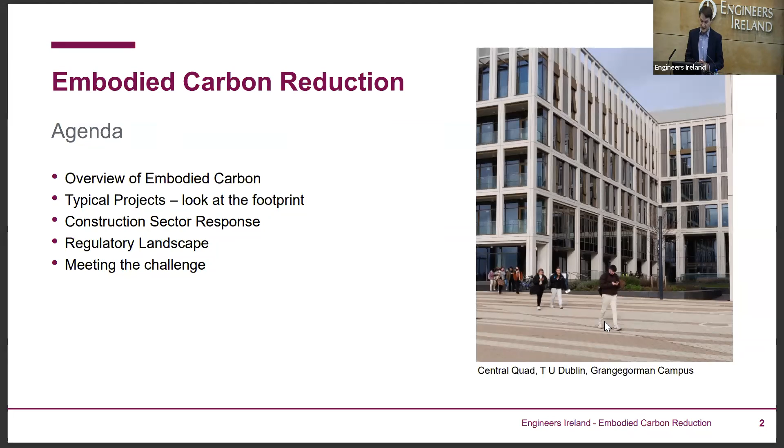We'll just look at an overview of embodied carbon, for anyone who isn't familiar with it already, and look at some of the projects and how we're going about measuring embodied carbon in those. We'll see how the construction sector is responding overall, look at the regulatory landscape and what's coming down the track for organizations and for projects, and then maybe how do we rise to the challenge as an engineering body ourselves.

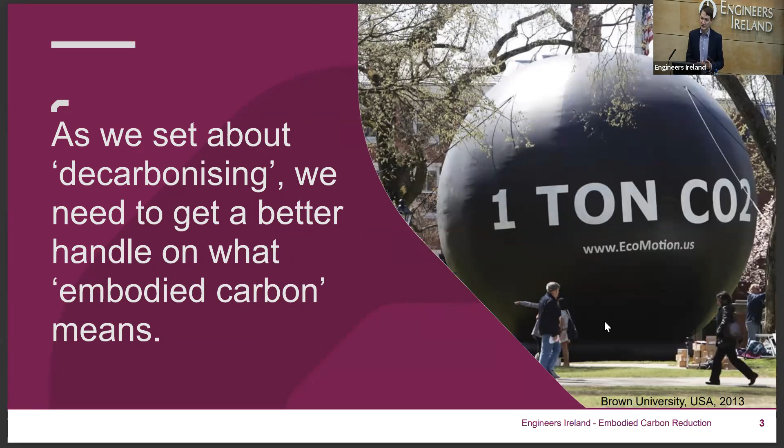The first thing to do, we talk about carbon becoming a very, very common word in parlance and media, but do we understand what it means and do we know what it looks like? The picture on the right is a slide from an American university in 2013. They said, let's create a graphic depiction of what a ton of carbon dioxide looks like, and that's what it is. So we all need to start figuring out more what a kilogram is, what a ton is, what impacts our own lifestyle is having, and more importantly, as designers, engineers and project managers, what impact our projects are having.

Now, because you're all good, knowledgeable CPD people here, you probably know the answer to this off the top of your head. And the answer, of course, is that when you divide Ireland's emissions by the population, you get about 12 tons of carbon dioxide per person per annum. That's 12 of those big balls that we're dragging around with ourselves individually.

If you look at the graphic on the right, you won't be able to see the detail, but it shows, from the developing world, the Democratic Republic of the Congo as the country with the lowest per capita footprint, all the way up to Qatar, which is the highest. The average across the globe is about 5 tons. So Ireland is already double the global average per capita.

And we're a lot higher than some of our peer countries, such as the UK or some of the Scandinavian countries. I suppose one of the challenges globally is that all the countries who want to develop, who want new infrastructure, who want better quality of life, have a lot of investment and infrastructure to build. Do they repeat the mistakes we've made with high intensity, high carbon solutions, or can we globally find better solutions and spread them across the world?

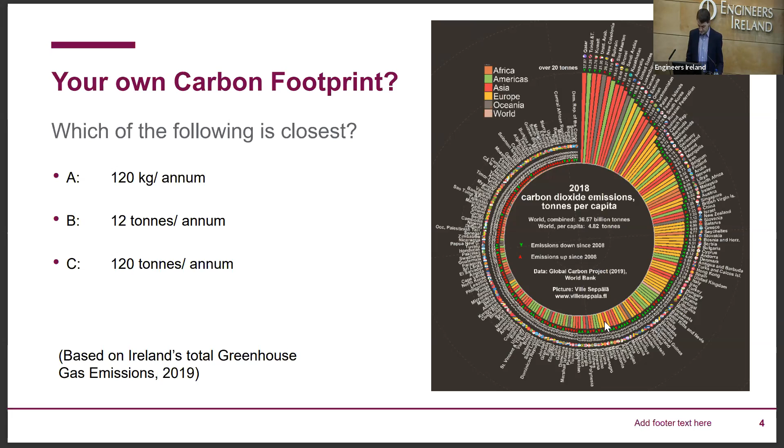The built environment, which is what we're talking about mainly tonight, is responsible for a lot of the global emissions of greenhouse gases. It's estimated about 40% of all emissions are related directly or indirectly to the built environment, buildings and infrastructure. It's also responsible for 40% of energy consumption, 50% of all raw material extraction—so that's a really big footprint on the planet—a third of all potable water use, and a third of all waste generation. So architects, engineers, quantity surveyors, we all have a responsibility to address this.

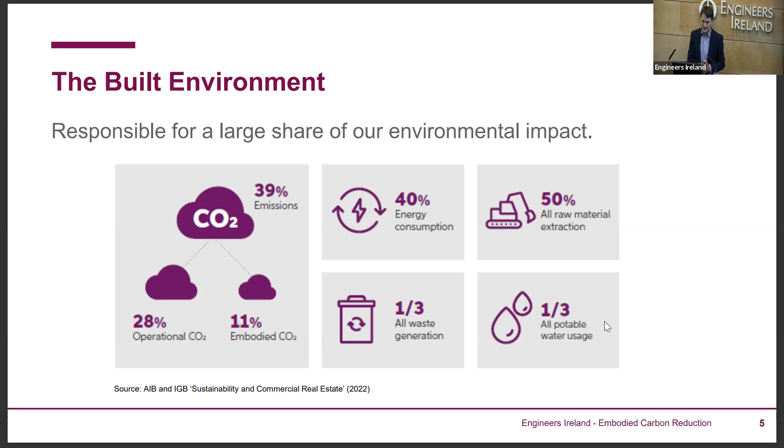In the carbon emissions breakdown, about 28% is associated with operations, which is the energy, heating and cooling, and then 11% is associated with the embodied carbon.

So one of the things your committee is working on is reducing the carbon footprint, or the carbon content, in our electricity grid and our gas grids.

And we know we're on a trajectory in Ireland to get 80% renewable electricity onto our grid, which will mean we'll have a very low carbon intensity intrinsic to every unit of electricity we spend by 2030.

So that's happening around the world, and as that's happening, the operational carbon is reducing, as seen there in the grey. The grey elements are getting smaller, but if the green stays the same, the green changes over the coming decade from being a subsidiary element to being the main element in the carbon footprint of buildings.

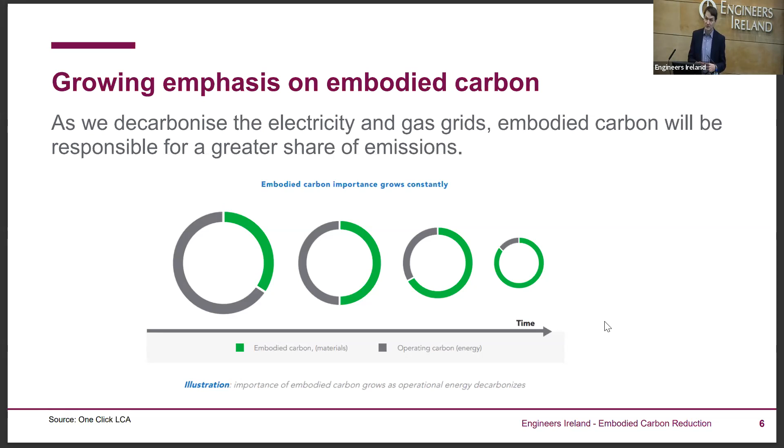So the graphic is just trying to represent that embodied carbon is going to become a major focus. And I suppose the good starting point, and to keep the momentum up, is just what do we understand? Have we got a common understanding of what embodied carbon is?

Some of us know a little bit, some know a bit more. One of the things we're trying to do is get everyone on the same page on this. So this is a very good document if you want to get into this.

It's a relatively easy to understand guide developed by the World Green Building Council, bringing embodied carbon up front. And the diagram on the right really encapsulates the whole thing. So you have three phases for the construction of a building or a piece of infrastructure.

You have the upfront carbon, which brings you to the opening of the building. You have the use stage embodied carbon. So that's not heating the building, but it's if you have to replace a window after 30 years, if you have to maintain floors, if you've got to fix cracks or do other operational investment. So that's the embodied carbon during the use stage.

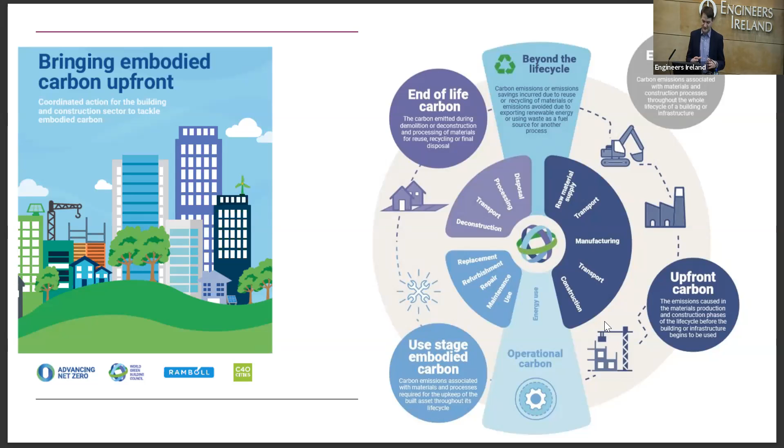And then finally, for anything we build, we've got to think about the end of life - the deconstruction, the transport away, and the waste and emissions associated with that. When you bring all three elements together, that's your total embodied carbon, and sometimes it's referred to as your whole life embodied carbon. So that's what we're drilling down into tonight.

And just to give it a bit more of a graphic presentation, the first stage is what we call embodied carbon from the cradle to the gate of a building or piece of infrastructure. The cradle, you can imagine as the earth or the ground. Everything we build starts as either minerals - metals, cement, aggregates for concrete - all that mining effort, the transport of ore, the transport of materials to places like refineries, cement kilns, steel refineries, oil refineries, all of that is going into making the product.

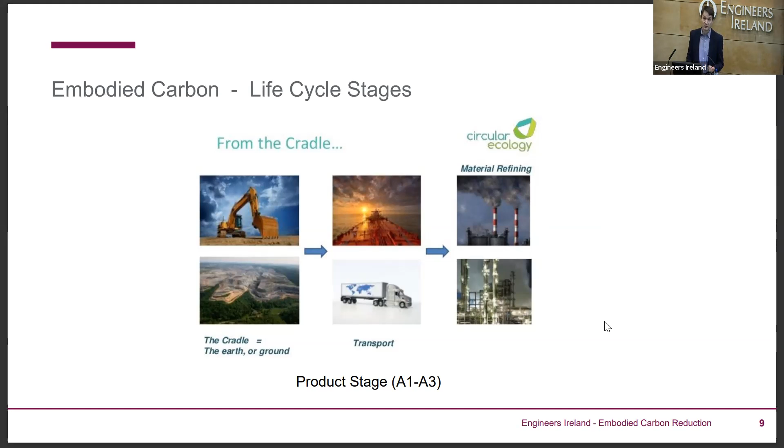And those three stages are known as the A1 to A3 stages, and that's when you get your building material or product. That's typically the biggest element of a carbon footprint of any project - it's the biggest element of the embodied carbon.

When you have your material, you then transport it. Sometimes it's only from Tallaght into the city centre, maybe a load of concrete. Sometimes it's halfway around the world - you might be bringing a pump in from China or from India. That transport effort has to be accounted for.

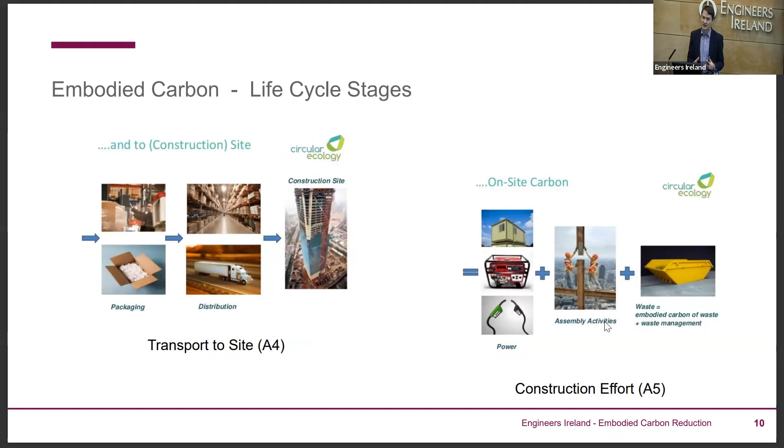And then on the right-hand side, if you're developing a building, there's the construction stage effort - there's the compressors, there's the cranes, there's the piling rigs. There's also the waste going off site. So all of that effort and energy can be calculated, and that's called your construction stage, the A5 stage.

Then going on to the maintenance and refurbishment - hard to get good pictures of this. That's replacement of a humble carpet, that's all part of it. Was that after 10, 15, 20 years? Do your windows last 30 years? Does your fencing last 50 years? So all of that has to be estimated and built into your calculation of whole life embodied carbon.

And that's very often not as obvious as the construction stage. And then finally, your end of life. So you see a building there, maybe a 30, 40-year-old office block, being crunched. It'll be taken off site. There's emissions associated with all that effort to transport, but also end of life.

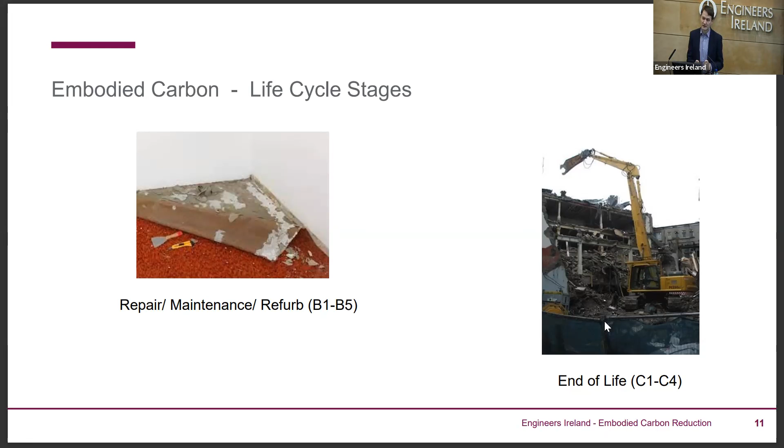Are there emissions if you landfill that, or if you have to treat it in a recycling plant or an incinerator or something else? All of that has to be accounted for.

When you bring it all together, the good news is that there's a standardized reporting system and we're following international norms. All carbon is reported in tons or kilograms of CO2 equivalent, a way of looking at all the emissions across different greenhouse gases and distilling them down to tons of carbon dioxide equivalent.

By using this standardized methodology, taken from PAS 2080, which is a standard for infrastructure carbon, we have carbon classified according to the use stage: A, upfront; B, operational; or C, end of life.

If we follow this systematically, it means we can compare buildings according to what category we're talking about. We can compare projects, and we can also combine the scores from different construction projects. If you're a company with 10 or a dozen different projects, you can combine your information and look across what phases are causing the footprint.

So this is very good. It's harmonized across all the standards dealing with carbon, and that's a good news story that we all tap into this same structure.

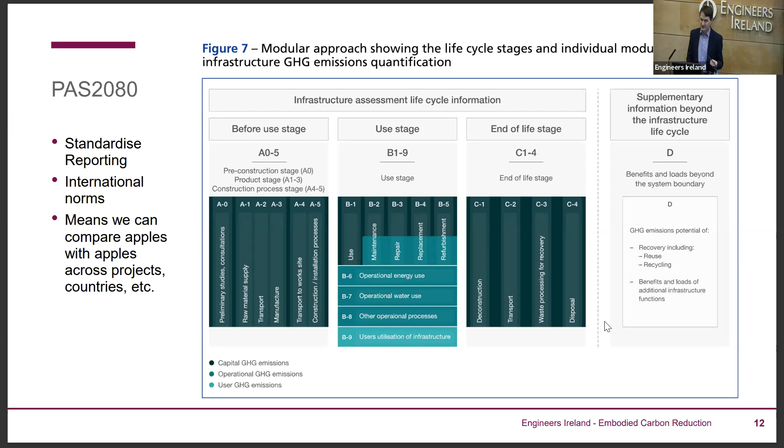When you apply that structure, and this is one we've done on a landfill remediation project in County Kildare, when you assess the footprint in embodied carbon, you drill down into each of those categories and you get an output something like this.

In this project, over 50%, shown in blue, was the products—that's actually the plastic liners, the concrete curbs, the lamp posts, the fence material. All the materials account for about 55% of the footprint here.

The next biggest category was actually the end of life. When that's decommissioned, maybe in 100 years time, how is that disposed of and what's the footprint of that? Then in between you had transport, construction processes, replacement and refurbishment over that 100 years, and other inputs from waste and so on during the operational lifetime of the project.

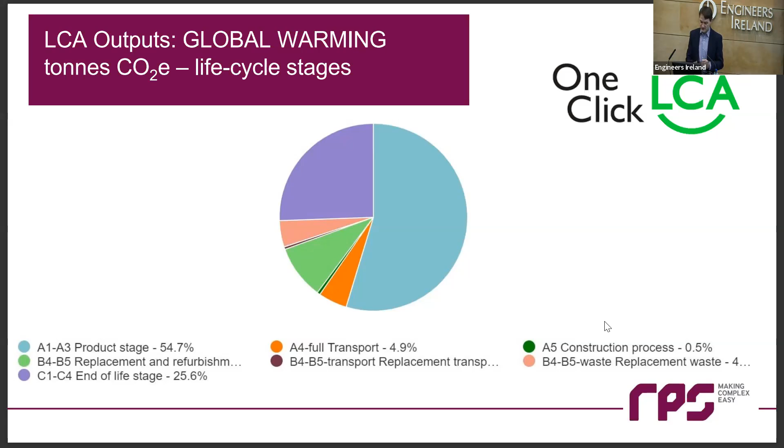The other outputs you can get let you examine this according to what materials are giving you the biggest input. In this case, in Kerdiffstown landfill, it was the plastic membranes, followed by asphalt and the soil and gravel, and followed by plastic pipes and flooring.

On any project the dimensions of this will change, but straight away you've got a very good picture by drilling into it—where do I need to focus my attention if I want to reduce this?

You might look at this and say, in this project, are the plastic membranes the area we really need to focus our attention? Do we replace them with another type of material, or can we change the specification and reduce the footprint? That's what that project looked like.

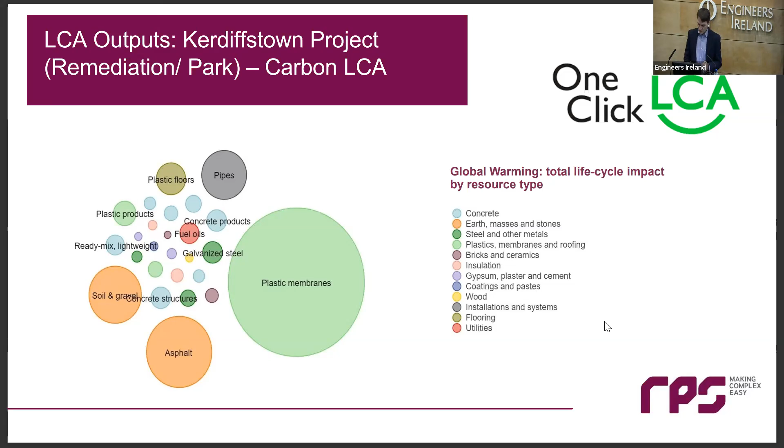It's maybe a little case study to pause on. This was a former landfill site that was quite problematic that Kildare County Council had to take over on behalf of the state and go through. It's being developed at the moment, finalized as a new public park and recreational area.

One of the innovations we did on this project was to do a whole life carbon assessment at the detailed design stage—a life cycle assessment, which I just showed you the results of. Moving on from that, at the tendering stage, we required the tendering contractors to do their own carbon life cycle assessment and to submit a carbon reduction plan, so they were being compared not just on price, quality, and safety, but also on environmental performance.

Now we're at the construction stage coming to an end. There's been monthly carbon reporting and updates, comparing it against the benchmark set during tendering. It'll be very interesting to see what further innovations they brought during construction and how their pre-construction estimates match what was done post-construction.

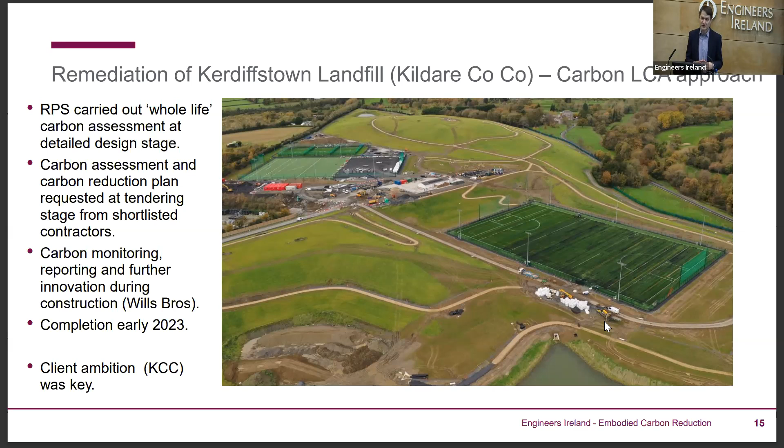In this case, it was Kildare County Council and ourselves, with very much the ambition and appetite from Kildare County Council to push ahead and do something more innovative and to try and make a difference on the carbon front.

So just in general, looking at how the construction sector is responding to the challenge of embodied carbon. If there's one key takeaway from the lecture, this is the one you want to try and remember. It really encapsulates the philosophy for thinking about embodied carbon and how to reduce it.

Key message: thinking early and starting early about embodied carbon reduction has the most opportunity to reduce the footprint. It's not a natural question we ask ourselves as engineers, but the first question should be: is there a way to avoid this project, or can we build nothing? Building nothing is a surefire way of not having any emissions.

So at a very high level, strategically, for any organization: are we doing more than we need to? Is this properly sized? Are there elements of this that don't actually need to be built now that we may not need in the future? Challenging that concept is very important.

Moving on from that, if you think about building less, you're moving into the design stage. You can think about building less, or building more efficiently, or building more cleverly. You still make choices here that determine not just the construction stage, but the lifetime stage. When you go into construction, a lot of the die is cast in terms of what type of material, what form, what scale. But there's still lots of efficiency and carbon reduction possible in how efficiently you build.

That can come down to operational methods, whether it's offsite or on-site, whether you use low carbon fuels, etcetera. When you get into the operation and maintenance stage, you have less opportunity to optimize and reduce carbon. So the message is: think about it early, think about designs that avoid and minimize at the outset, and then move down through the stages.

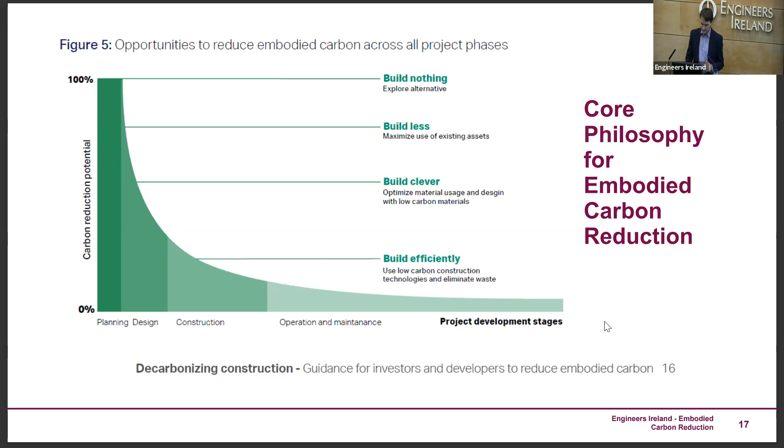Just to give you an example of the build cleverly approach: in the Glasgow Airport Investment Area project, we were in a design build partnership with Wills Brothers. One part of the project was to build a road over some buried 132 kV high tension cables, which are oil filled cables. The baseline design was to build a concrete bridge over them.

Wills Brothers and ourselves said, well, look, is there a better way? Is there a lower cost way? Could it be done with styrofoam blocks, which they have a lot of experience with? But the regulator, Scottish Power Energy Networks, wasn't comfortable with that in terms of temperature control.

We went back to the drawing board and came up with a solution using crates normally used for water storage in sustainable urban drainage systems. We redid the calculations, re-examined the technical and safety aspects, and put that back to Scottish Power Energy Networks. After some consideration, they gave it the green light.

This was built, and the saving was a massive 87% reduction on the concrete baseline approach, saving 1,300 tonnes of carbon. It probably also saved cost on the project and was fine in terms of programme. This was recognised with an award in the ICE Carbon Champion Awards in 2021.

So that's probably an example of building clever. I think we all have an obligation now to start looking for solutions like that, and not just repeating business as usual, pushing the limit. What was really important here was that Scottish Power Energy Networks were open to the idea of innovation and change, and it's important that regulators come on this journey with us as well.

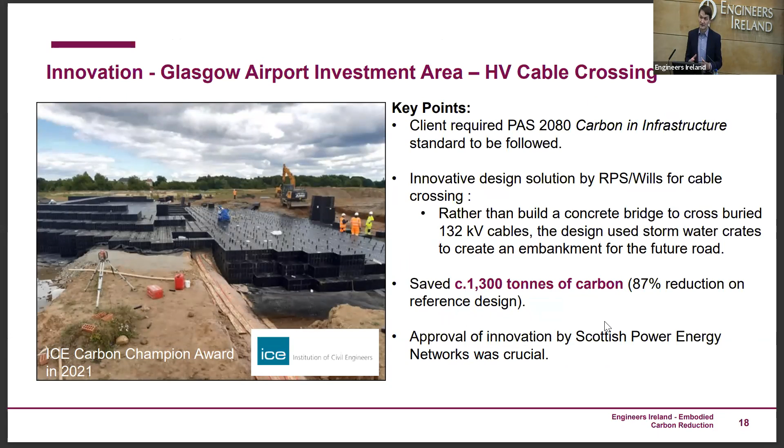So in terms of the engineering sector, and civil engineering in particular, how will we find carbon reductions in buildings and infrastructure? This is a schema we've developed as a way to think about where we start and where we move to. The first thing I'm calling level 0 is to understand what we're dealing with.

Then you move through level 1, which I think is the low hanging fruit, where we don't necessarily revolutionize what we do, we just adapt and optimize existing systems. We need to move on to level 2, which would be really reassessing the designs, the materials, and pushing further on innovation. And then ultimately, we're going to have to strive for net zero 2050, as pretty much all the economies have signed up to being fully carbon neutral at that stage.

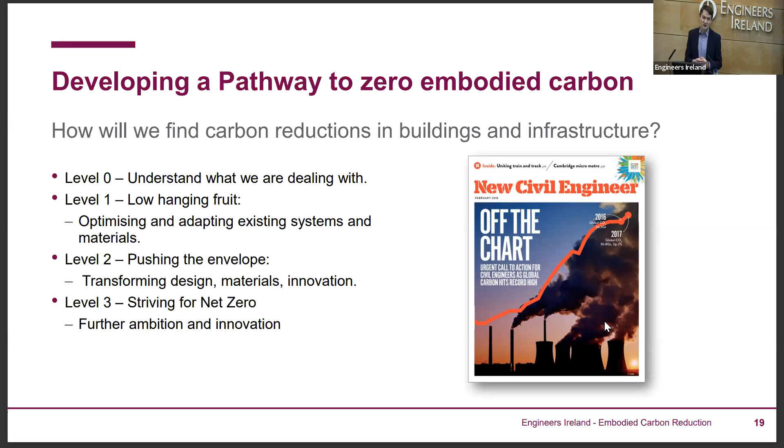So that's going to push us even further in the years ahead. So what I mean by level 0, it's first of all what is the baseline, and preparing a baseline carbon life cycle assessment. It's becoming the norm for infrastructure projects, but at the same time, it's not done across the board. There's an awful lot of catching up to be done. It's increasingly going to be a requirement for project approvals.

So if you put a motorway, a bridge, a transport project, a big water project before An Bord Pleanála, they're going to be looking for your carbon accounting. They're going to be looking for a very detailed climate mitigation chapter in your environmental impact assessment report. And the foundation stone for that is to know what the footprint is of the project and to know what the operational emissions will be as well. The overarching standard for this is Publicly Available Specification 2080, and that's 2016, but it's being revised at the moment. So that sets the standard.

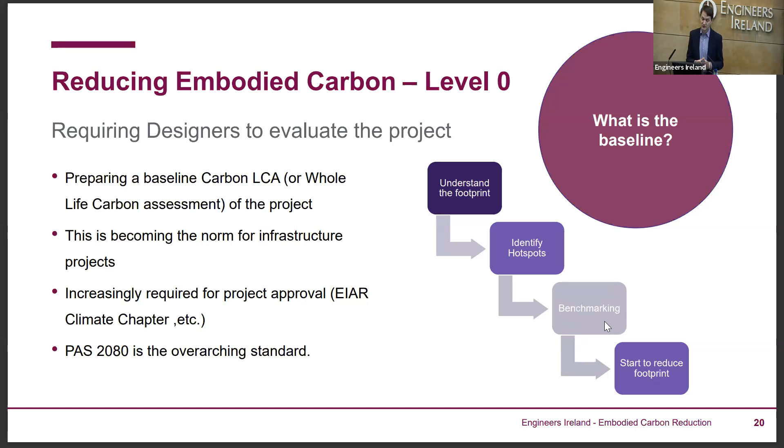So your level 0 really is to understand the footprint, identify where the carbon hotspots are, like I showed you in Curtistown, carry out some benchmarking. Is there another kilometre of road you compare with? Compare your bridge deck intensity per square metre, or maybe your water pipeline. How do we compare with international benchmarks? And finally, then you set about drilling down into your design and your specifications and seeing where can I reduce the footprint.

One of the important inputs into that process of understanding your footprint and looking for reductions is quantifying. And you may have heard about EPDs, what they are. That's an environmental product declaration. So people putting building products on the market, whether it's a concrete curb, in this case it's insulation, a steel beam, increasingly they're being required to prepare EPDs. So that's an independently verified statement of the environmental impact of that product.

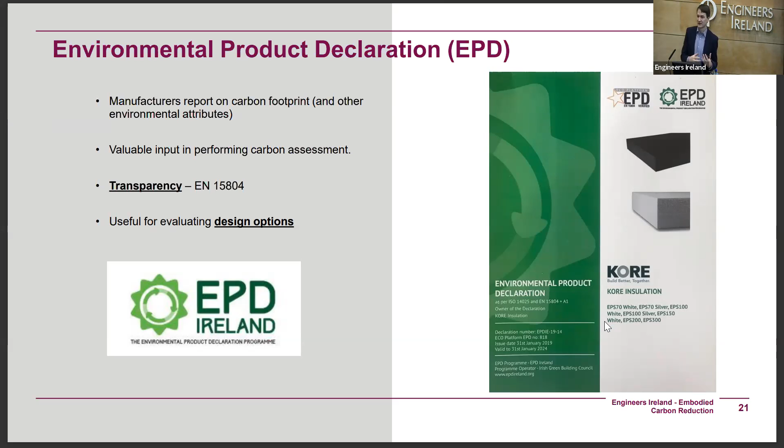It includes carbon. It also includes other elements of environmental impact. And the more EPDs are prepared, the more clarity and transparency and accuracy we have in calculating footprints on projects. So that's something that all the building products industry is getting on board with at the moment.

So moving to level 1, then, reducing the embodied carbon. A lot of the conventional methods are underway at the moment. There's a lot in this slide. It takes into account things like design efficiency. So let's say structural design. You may have used a certain spacing of beams, a certain slab depth. You may have built in certain factors of safety, and maybe there's a generosity there or a conservative approach. We have to go back and re-examine those.

Definitely for people specifying structural steel, concrete slabs and so on, even a very small percentage change in the strength of your concrete, the depth of your slab, the spacing of your beams, even a 5 or 10% saving there can make a very big impact on your footprint. Same for people designing foundations and so on. So with just lean design and efficiency, there's gains to be made.

Then you look at material selection, whether it's your concrete specification. Again, a lot of progress, we're moving away from a lot of the traditional mixes, moving towards lower carbon mixes with GGBS or PFA fillers and so on, also low carbon steel alternatives. So that's very much within our grasp and not a big change in philosophy for our designers. Internal finishes in buildings, internal fit-out, again, there's maybe a leaner way to do things, or materials that have a lower footprint that can be employed.

Moving on to the construction processes, a lot of the big contractors are already in the game here. They're switching to electric plant, they're switching to hydrotreated vegetable oil instead of diesel. Increasingly, there's a lot of emphasis on off-site construction and modern methods of construction, which can gain time, reduce programme; manufacturing in a controlled environment reduces waste, usually with a bit more energy efficiency. So even by reducing the construction period itself, if you can knock 5, 10, 15% off a construction period, that in itself is going to lead to energy savings.

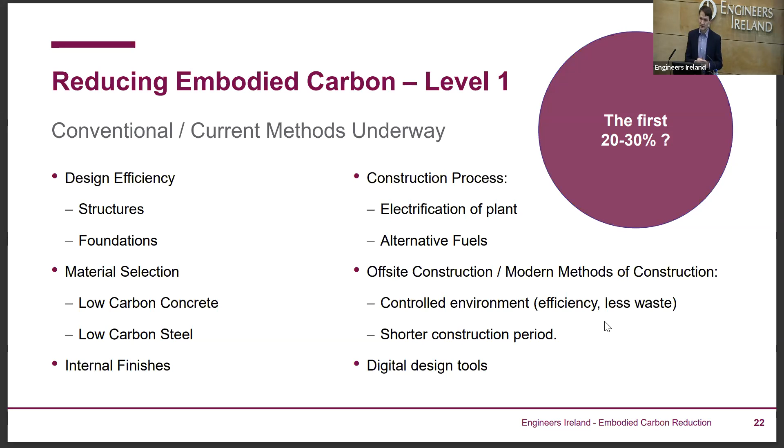So all of that is well within our grasp, and typically companies are setting targets to get a 20 or 30% reduction in their embodied carbon just through these, let's say, conventional methods. Here's an example of a study that was done for the UK Green Building Council. They looked at a housing scheme for 750 houses in Cambridgeshire, and this was purely the civils and the structural, the piping, the drainage, the roads and footpaths.

So they found that you could reduce the carbon footprint of that by changing the design and just being leaner and maybe more nature friendly, reducing the depth of paving, reducing the width of streets and so on. 20% reduction in the carbon footprint, and the cost increase there only 0.6%. So that's just a fresh approach to design, a fresh lens, and moving away from business as usual in that layout.

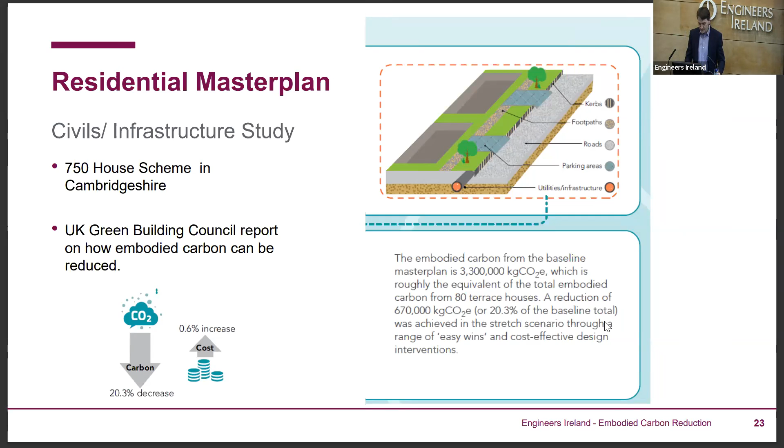And our own mothership, if anyone joining us from Cork, I think there are a few Cork people on the line, you may have passed by the Inishmore, the original MC O'Sullivan mothership, and that's been recently refurbished. So look, we had the option of demolishing it, changing it around. We kept the existing structure and just did an internal refurbishment. So that's keeping the embodied carbon that was in the frame of the building.

In terms of the fit out, you can see there's no suspended ceilings or anything like that. So you've gone for this bare look, again, another carbon reduction there in embodied carbon. And just the efficiency of space planning is another way to look at an existing building. Can you do more with your existing footprint instead of building an extension? Can you free up floor space for other uses? That's another way to reduce embodied carbon.

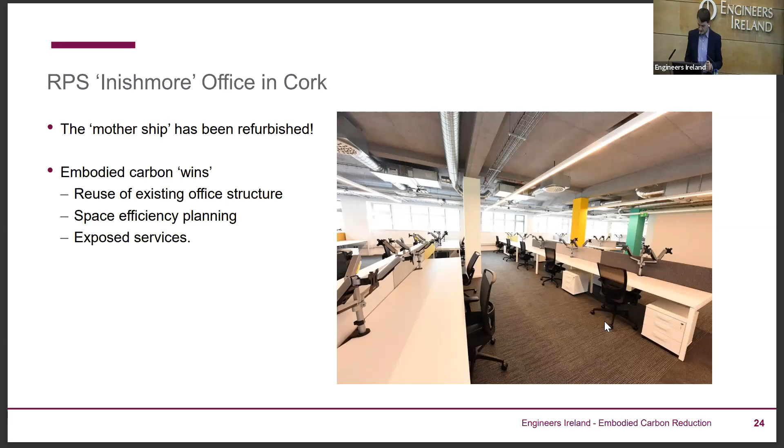So a question I'll ask the audience, you can think yourselves, is does carbon reduction lead to cost reduction? Is it always one follows the other? I suppose the answer is yes and no. So if you're in that stage where you're reducing investment, where you're avoiding major projects, where you're in that lean design, where you're using clever solutions, yes. So for example, the Gaia project, Wills Brothers and ourselves, they didn't just do that to save carbon, they also saved money on the project, its programme. And there are an awful lot of occasions where your efficiency, your leanness and your reduction in material use is going to save money for the client.

When you move down and you move to other areas like the more demanding innovation, where we need new materials and maybe new techniques that are less familiar, where there's less economy of scale, in some cases the cost is increasing. And there's kind of a line there where it's a little bit more difficult for clients. Everyone's in favor of carbon reduction, but if that new concrete mix is going to save you 2,000 tons, but it's going to cost you 50,000 euro more on your contract, is the client going to say yes or no?

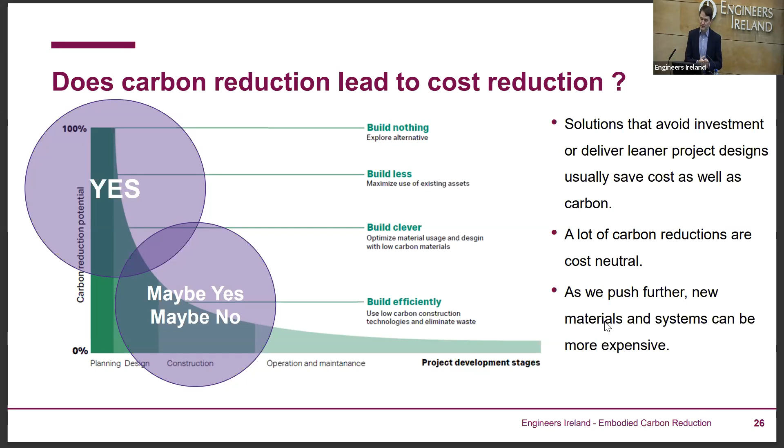So we're kind of at that situation now where we're beginning to measure and we're beginning to realize there are some tricky decisions to be made. So I suppose the going in point is to try and find reductions that are cost neutral or cost beneficial, but then to push the client and say, look, if you're serious about carbon reduction, this extra investment is worth it.

So going to level 2, reducing embodied carbon further, where will we get, say, the next 30% of reduction? It's really all going to be linked to innovation, particularly around low carbon materials. So novel materials and novel building systems. An element of that will be things like biogenic materials, such as wood or other organic materials. So they have a footprint, but it's much lower than synthetic materials. And the carbon that's in a piece of wood, like the paneling behind me, was extracted from the atmosphere to develop in the first place. So it's generally regarded as, apart from the processing of the wood, the material itself can be taken as carbon neutral.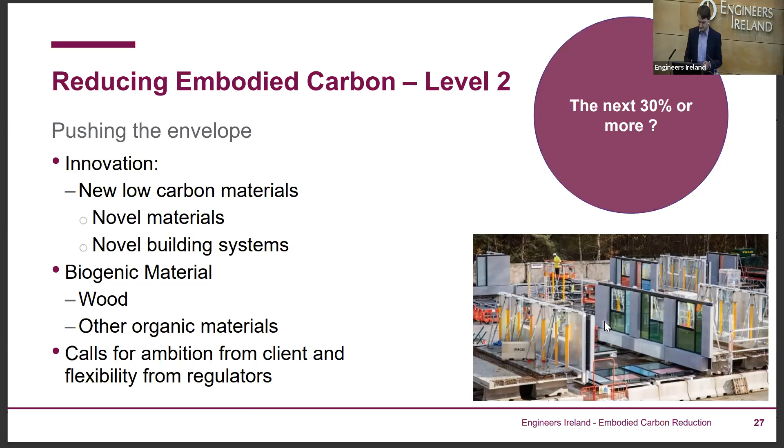So to get this extra 30%, we're going to have to be a lot more ambitious, and we need a lot more flexibility as well from people setting building standards and from clients approving completion and so on. So just to give you an example, for the traditional materials, there are low carbon roadmaps being developed for concrete. So the ICE has just published one, and on the right, National Highways has just published one for concrete, steel and asphalt.

And in the diagram there, you can see the range of opportunities there are, even working with a familiar material like concrete, just to look at how do we reduce the footprint. So yes, the cement producers have to look at lower carbon fuels and lower carbon production processes, and they are doing that, but it will take some time.

But straight away, we can look at lower cement content. We can look at pile void formers. We can look at reduction in blinding thickness. Explore how we transport materials, maybe low emission vehicles. Look at curing strengths. If we're using concretes with a mix that has a slower strength gain, that we allow for that and we don't rule those out on the basis of a 28-day strength, when maybe a 56-day will be adequate. So there's a whole range of options being chosen.

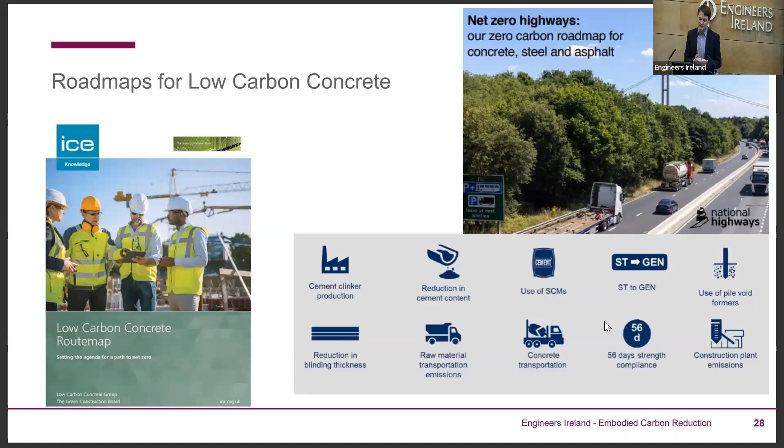So I suppose the traditional materials, the steel, the asphalt and the concrete, they're all responding and rolling up their sleeves to take on that challenge, and the cement companies as well. I suppose there's another level we can go to then, where we go back and re-examine what we know as traditional acceptable design. So the case study here is the University of Bath, where they looked at the opportunity for a thin shell vaulted floor slab approach, and the man is standing on the vaulted slab there. You can just see how thin that is compared to what we're familiar with. That research estimated that you could reduce the carbon footprint for an equivalent slab by 75% over the conventional.

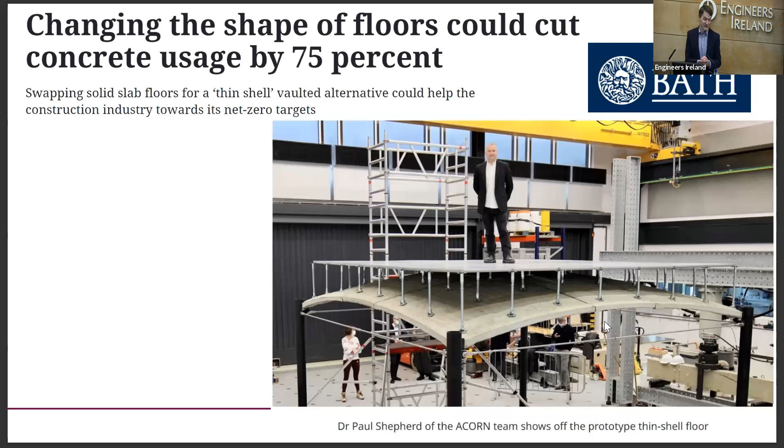So that's going back to the cooperation then between industry, university researchers, material producers, and coming up with new approaches and being prepared to move away from the tried and trusted. And that's going to take a little bit of time and take investment, and the initial solutions will be a bit more expensive.

There's an array of novel materials emerging that are trying to enter that low carbon materials market. So this is an interesting one. It's a reinforcement bar, not made of steel, but made from basalt. So it seems to be a crushing of basalt rock and reforming it into various forms of mesh and a reinforcement bar. So again, something we wouldn't have heard of, wouldn't have thought of. It's going to be in competition with steel and other traditional materials. So we have to prove it, we have to test it, and we have to have the courage to use it. And I suppose start small pilot schemes where there's maybe less risk, where durability is an issue, and lots of laboratory testing required.

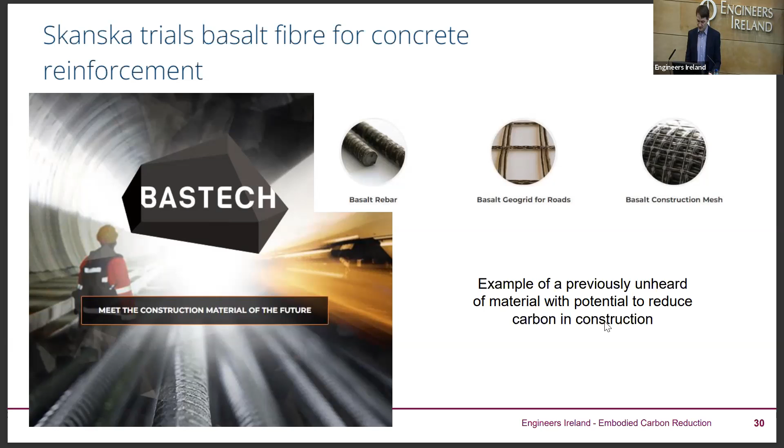Another avenue for dramatic reduction in carbon will be using traditional or biogenic materials, so naturally occurring materials grown from timber or other plants. What you see in the picture there would be an example of a tall structure built without steel or concrete in the structure. So the wood here is taking on structural loading, and there's an increasing emphasis on this globally to try and push buildings up. You may be familiar with timber frame buildings, 2 stories here, but these are pushing to 8, 10, 12 stories and taller buildings, achieving fire safety, achieving structural stability. But if you take out the steel frame or the concrete frame from a structure, you make a massive saving in the carbon footprint. So this is another avenue of development.

At the moment in Ireland, the CLT isn't manufactured here, so it has to be imported, but there is research going on into how we can adapt the Irish timber to create our own CLT paneling systems and to compete and produce locally available CLT options for building here.

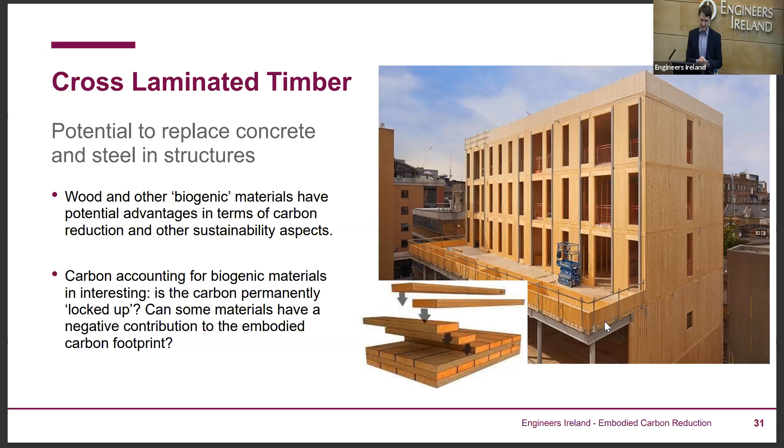And the good news on the innovation front is that a new National Centre for Innovation has just been launched just before Christmas, and it's led by the University of Galway, but taking in University College Cork, Trinity College and UCD. The 2 co-directors will be familiar to members of Engineers Ireland: Jamie Goggins, who was a member of the council for a number of years, and Magda Hajdukiewicz, who also has contributed to the Engineers Ireland Sustainability strategy and spoke at our annual conference this year. So we're in really safe hands with this. There's a real ambition there, there's a drive.

This is going to bring together a lot of researchers from various universities, so we'll have enhanced resources for testing and modelling. The whole emphasis here is to try and drive collaboration between industry, whether that's concrete producers, steel producers, the users like house builders and modular construction companies, and the academic world. It's a very exciting venture, sponsored by Enterprise Ireland with a lot of government backing.

I suppose one thing I'd like to touch on, it's not the focus of tonight, but the relationship with the circular economy. It's another theme that's strong on sustainability, and if we can find solutions that increase resource efficiency and reduce waste, they're inherently going to reduce carbon.

So this is a really good picture. We all played with Lego. We didn't scrap the building at the end and throw it in the bin, or take the little bricks and crush them down and recast them into new Lego bricks. We took them apart, saved them, and reused them again and again. Building design needs to move into these circular design systems.

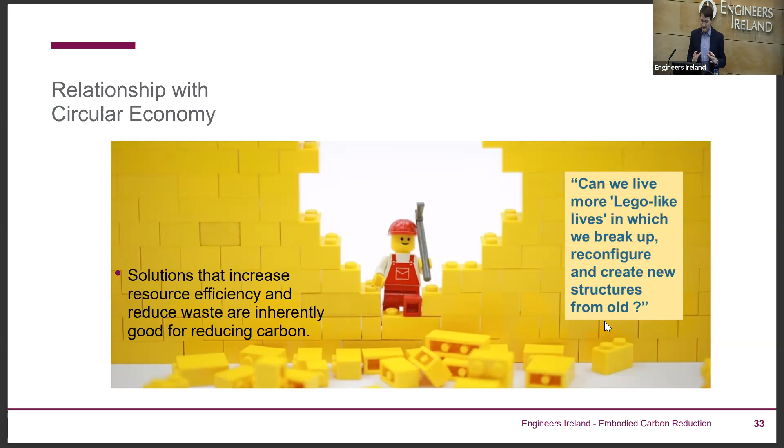So whether it's a concrete slab, a steel beam, a column, or a timber panel, can we capture that? And if that building reaches its end of life after 30 or 40 years, can we reimagine the use for that same component without having to recycle it in some energy intensive way? So there's a lot to be gained there. There's a whole other talk on the circular economy and carbon reduction.

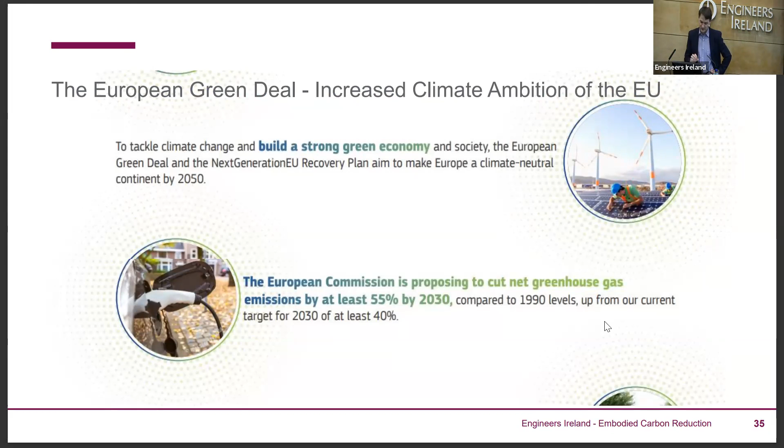So just moving on then to the regulatory side of things, and what are the drivers pushing this forward? Certainly the European Green Deal has set a really important agenda. It's all about economic recovery, employment creation, but in a very much low carbon society, cutting emissions by 55% compared to 1990 levels - a really, really big target. So a lot of the legislation and policy trickling down is really driven by the Green Deal, both for carbon reduction and for circular economy.

Our own climate mitigation approach, we have an all-of-government climate action plan from 2021, now updated to 2023. That has set sectoral carbon budgets, multi-annual carbon budgets, assigning a limit on the total emissions we can emit into the atmosphere in that period. And through the latest climate action plan, that's now been translated down to sectoral budgets - not just our national targets, but our transport sector target, our industry sector target. There's annual measurement and reporting. So it's beginning to kick in here that we're really beginning to realize the changes that are going to have to come, and quickly.

And we've a legally binding piece of legislation, the Climate Action and Low Carbon Development Amendment Act. That's enshrined in law the objective of reaching carbon neutrality by 2050 and reducing greenhouse gas emissions by 51% by 2030. So really, really ambitious targets there.

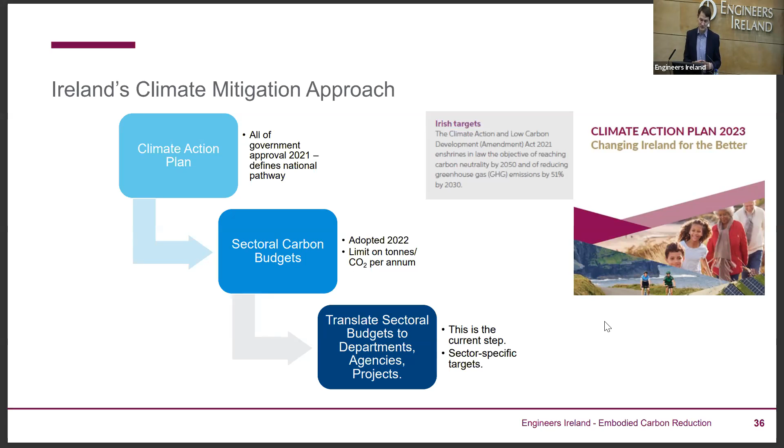So ourselves, engineers individually and Engineers Ireland, this is a challenge we've really got to respond to quickly. For example, the recently published Climate Action Plan, for the first time, has set specific targets for embodied carbon reduction. Under the heading of industry, we want to decrease the embodied carbon in construction materials by 10% by 2025, increasing to 30% for materials produced and used in Ireland by 2030. That's a tall order for all the construction product manufacturers, whether insulation, metal cladding, steel frames, concrete, or precast - all of that will come under that target.

There's also, under the built environment, an ambition quite specific for public bodies. Public bodies spend a lot of money and develop a lot of infrastructure, and there's a requirement now for public sector projects to set specific targets for materials like low carbon cement products, and to address embodied carbon in the contract specification. The project I showed you in Kurdistan was maybe a pathfinder, but that's going to become the norm. Very quickly, these targets will translate down to the design teams, who'll pass them on to the construction teams, who'll pass them on to the material suppliers. So this is beginning to kick in now and have more teeth than it had up to now.

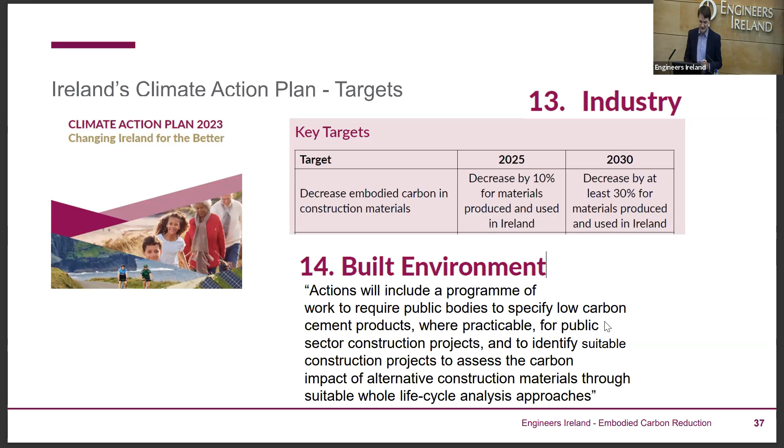In the UK, there's a lobby group that wants to push for a new amendment to the building regulations, and they're calling it Part Z.

At the moment in Ireland, our Part L sets an NZEB standard, nearly zero energy building, but that's on the operational side. To be fair, in Ireland we've got very high operational energy requirements, but we don't have anything at the moment on embodied carbon.

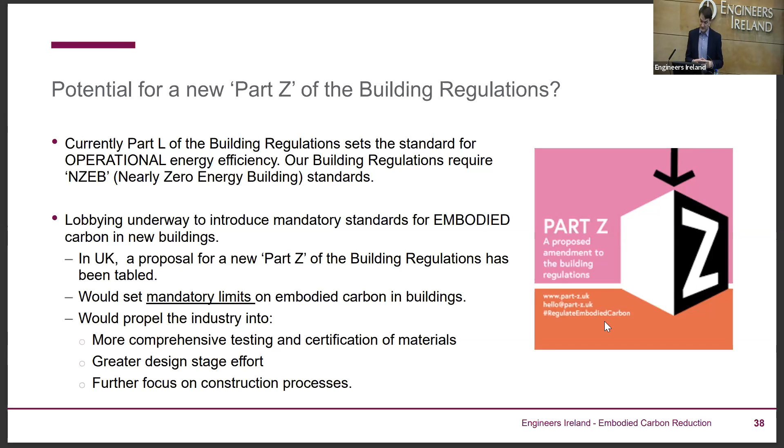So in the UK, they're talking about setting mandatory limits to propel the industry into more comprehensive testing and certification, more effort at design stage, and a further focus on construction processes. And it's already happening in some other European countries. The Scandinavians have taken the lead, and also Germany, Netherlands, and France.

So what you have here in their building regulations, starting with the requirement to do your calculations and your whole life assessment and to learn what embodied carbon is in the building. Usually switching over from about 2025 onwards, then they're setting actual targets and benchmark limits that have to be met.

So in the same way as you have to design a building with a certain degree of air tightness, fire safety, in the future we'll have to design a building with a certain level of embodied carbon. That'll be benchmarked from the initial work over the first few years. So that's on the way here. It's not part of the climate action plan specifically yet, but I don't think it's too far away.

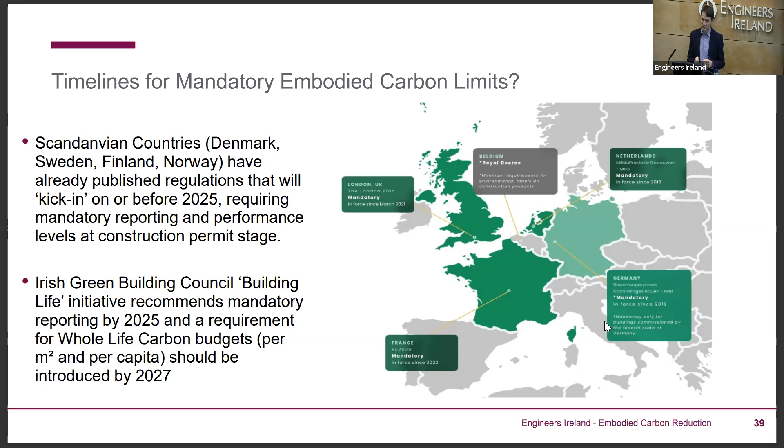Another approach, regulatory, and this is interesting, is the London plan. This is the development plan for London, and they've moved ahead of the UK national requirements. They're now requiring, for major developments, a whole life carbon assessment as a part of the planning approval stage. And they're also looking for a circular economy statement for the larger schemes.

So I think it's an example of another regulatory tool, not the building regulations, but the planning code being used to set the standard and to push for embodied carbon reduction. Often London moves ahead and the UK follows. So it'll be interesting to see if this takes root in other jurisdictions as well.

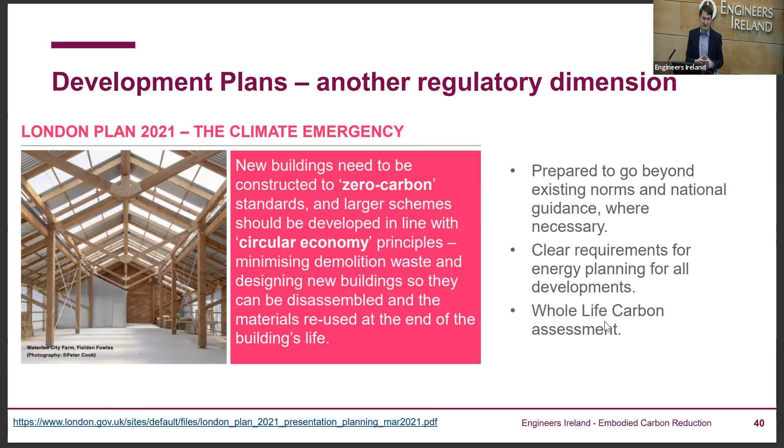So if that's where things are moving regulatory, and maybe in terms of the overall industry, if you're a specific organization or a specific designer, or you've got responsibility for developing infrastructure or buildings, what can you do yourself? I suppose the steps would be: what you can measure, you can manage. So start by getting a better understanding of what impacts your project are having.

If you're appointing design teams, challenge them not to just copy and paste what they did the last time, but challenge them and the construction teams to reduce embodied carbon. And you're going into that in the knowledge that we don't really know an awful lot. But if you start with your baseline benchmarking and do your research on that, you get a feel for it.

The third step, once you've done that, is to move on and look at your overall portfolio. So if you're a big organization like TII or OPW or Irish Water or a big energy company, you can look across all your projects and start to combine the information you have and get some more intelligence. Where is our footprint really? Is it in materials? Is it in transport? What type of buildings are biggest on our list of embodied carbon?

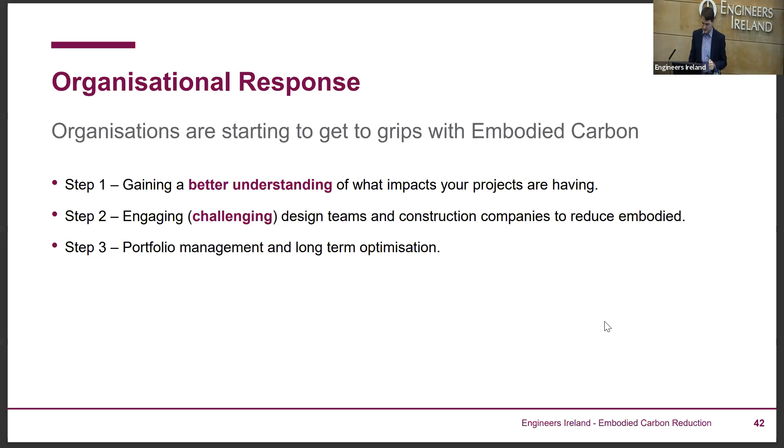But before you do all this, you maybe need to step back and ask yourself, does your organization have an ambition? Have you got a policy on what your attitude is to embodied carbon? Have you got a pathway to 2050? Otherwise, you'll get down to your step two and find that, well, I can reduce embodied carbon, but it's going to cost more, or it's going to be a lot of difficulty. And you may just let it drop unless your organization has made a strong commitment and has signed up to taking those hard steps and pursuing targets diligently.

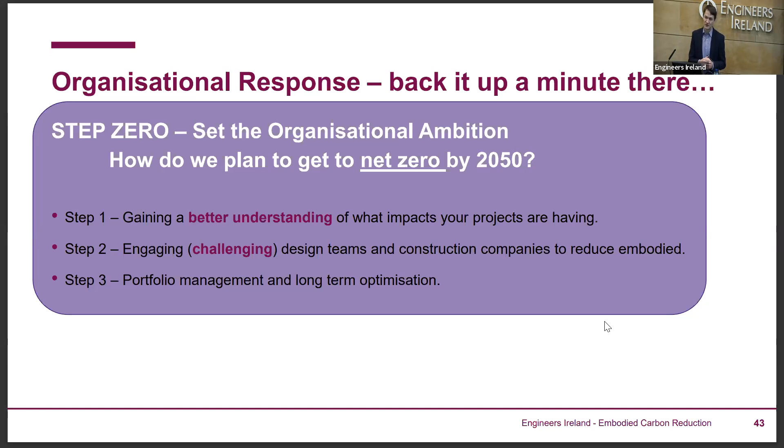So this is where having a really good blueprint, really good leadership, and a strong strategy at organizational level is important. When you get down to project level, there's a lot of good guidance in PAS 2080 about it being a whole team approach—engaging designers, contractors, and whoever the client for the project will be.

What's really important is that there's an overarching goal, that you decide at the outset what you want to achieve on the project, and that there's a governance system, so that in the same way you have governance for health and safety on any big construction project, with reporting and clear lines of authority, we need to replicate this for carbon as well. Your governance covers the requirements, the targets, the reporting requirements, and who's responsible for what. Once that's set up, you can set your design targets for your design team.

They will translate that down into actions, revised designs, and construction stage targets, and all the time you're feeding this back up. You're also setting operation stage targets for operational efficiency and maintenance efficiency. It's worth researching the past projects, and before you initiate a project, try to get these good principles integrated—it'll pay dividends in the long run.

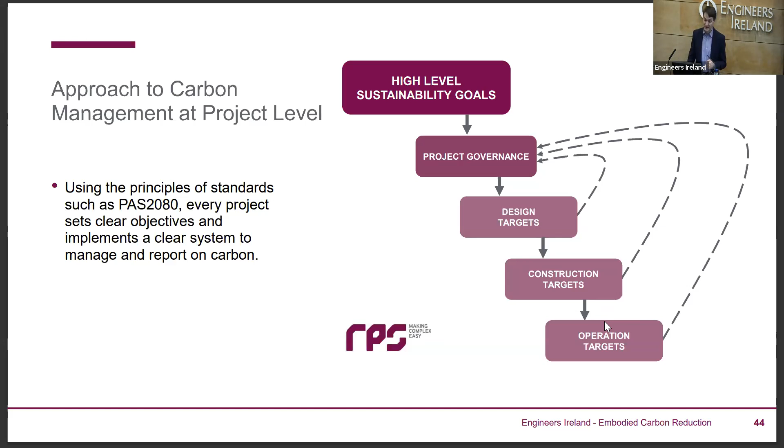The good news is, if you follow this, you're going to have a clear understanding at the end of your project of what your footprint was, where you made your reductions, what the additional costs were, and so on. Then you can bring that back together. This is an example from Skanska, where they combined all their major construction projects from Northern Europe.

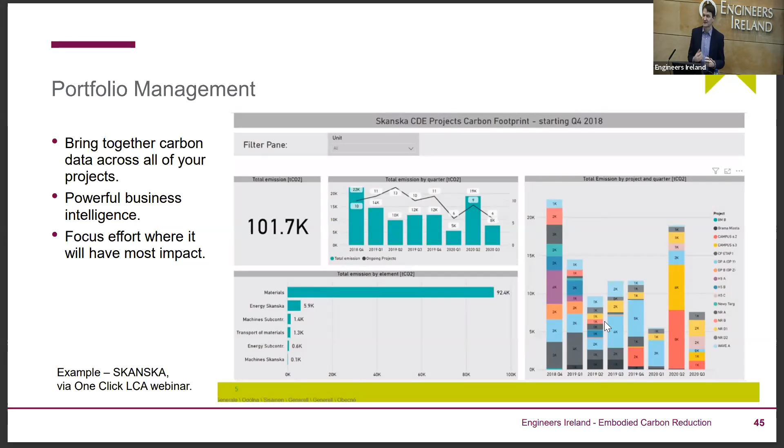If they change their policies, for example on EPDs or types of concrete mix, they'll be able to plot that and see what difference it's made, not just on one project, but across the portfolio. This kind of business intelligence is the next stage once we start having data to deal with from individual projects. So aiming for net zero is the next step.

Can we take a project and really drive for a net zero overall project? Some companies have the ambition of a net zero asset, and we've developed an approach to that at RPS, for how we go about doing that.

We're working on the Galway to Athlone cycleway project—Westmeath County Council are leading it on behalf of a number of local authorities, and TII are coordinating. On that project, we're exploring the opportunity to make the entire cycleway a net zero carbon project. There are two elements to that: the first is driving down embodied carbon through design changes and innovation.

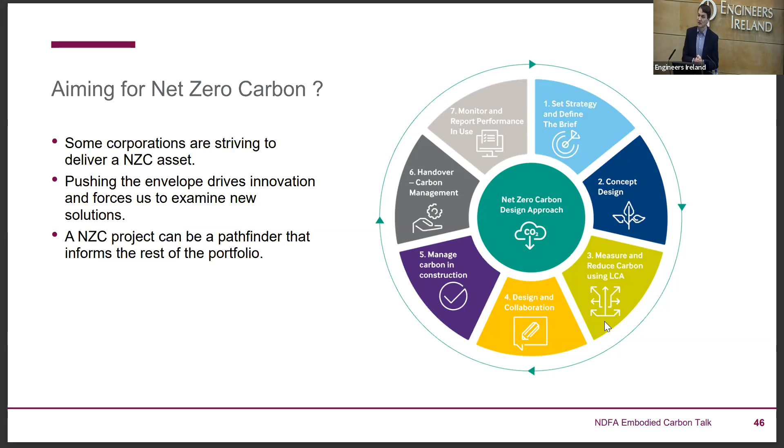The second element is looking at the amount of carbon in operation and embodied carbon, and looking for opportunities for carbon sequestration within the project itself, whether that's through renewable energy generation, carbon sequestration and tree planting, or peatland regeneration. So that's going to be an interesting concept to see—can we achieve a fully net zero project? And if it can be done on a cycleway, then maybe it can be done on bigger schemes as well.